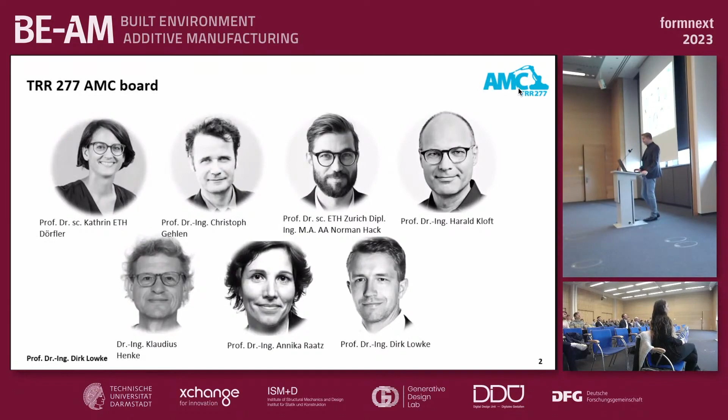When I was born, somewhere in the middle of the 1970s, there were about 4 billion people on this earth. Some months ago, you heard it from the news, we exceeded 8 billion people. So there's a steep increase in population in the world.

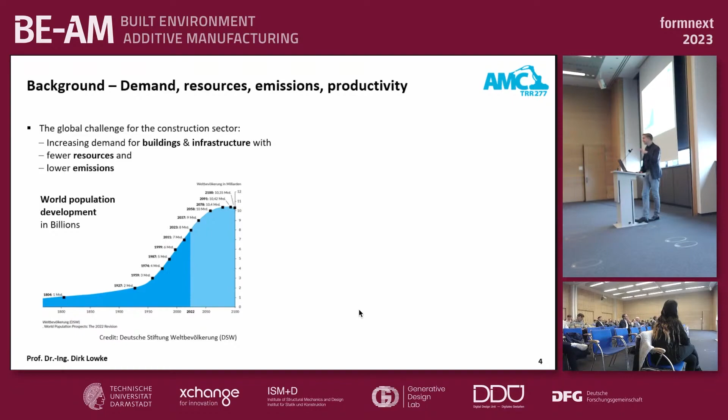However, construction is not prepared for this challenge. As you can see here, since the 1970s of the last century, the productivity is almost constant. We have not developed in construction, we have the same productivity as in the 1970s.

And on the other hand, with this technological stillstand in development, we are less attractive for young people. It's the second problem we have. Young people are not anymore keen to become a civil engineer, for instance.

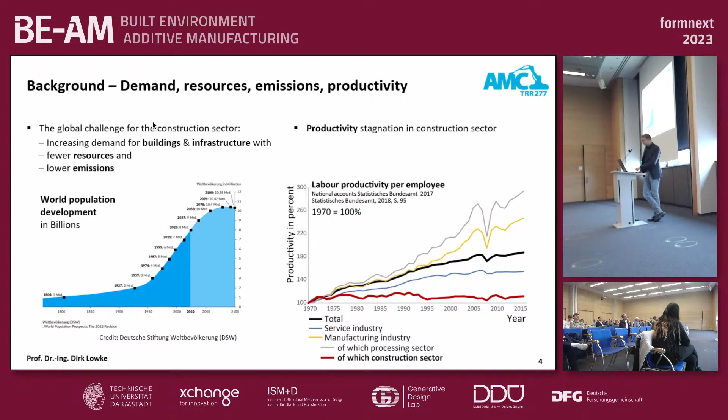If we have a look at other industries, we see there is huge progress in automation, but in construction, we still have this huge amount of labor activities on the building site. And digitalization has not arrived at the construction process too far.

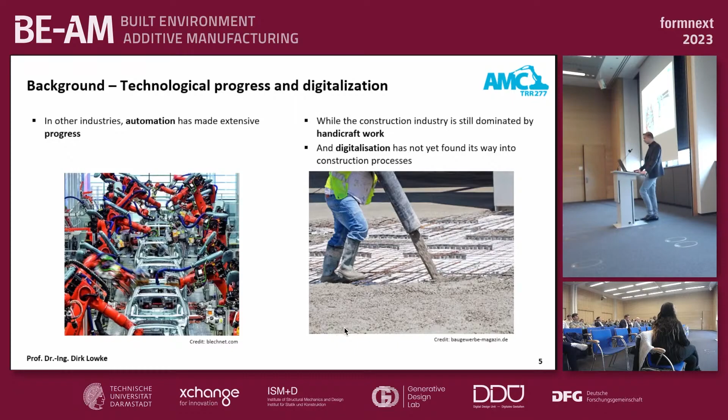Also, there was some progress in the planning phase. I think a lot of architects are here, but as you come to the building site, there's a break in the digital chain, and the real construction process is not digital.

If you look on the right side, you see typical construction elements made of concrete, and these are often characterized by mass-intensive and resource-consuming geometries, and this means we have high CO2 emissions here.

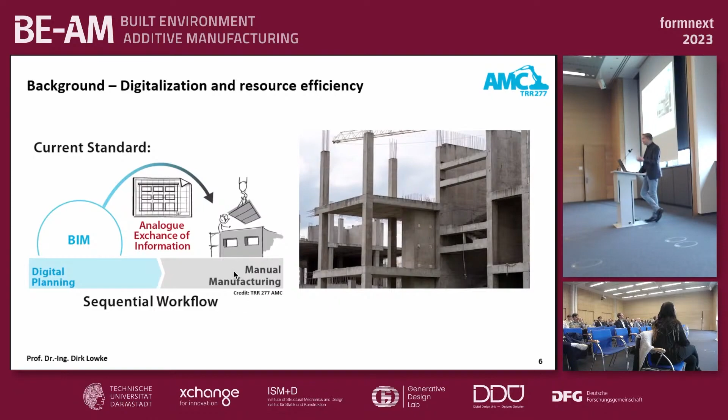So the good news is, with additive manufacturing, a promising construction technology is emerging right at the right time. We believe that the technology of additive manufacturing can help solve a lot of the problems I mentioned before. With additive manufacturing, for instance, you can significantly increase the automation in the construction industry. With additive manufacturing, you have no need for special tools if you want to produce different shapes or different forms.

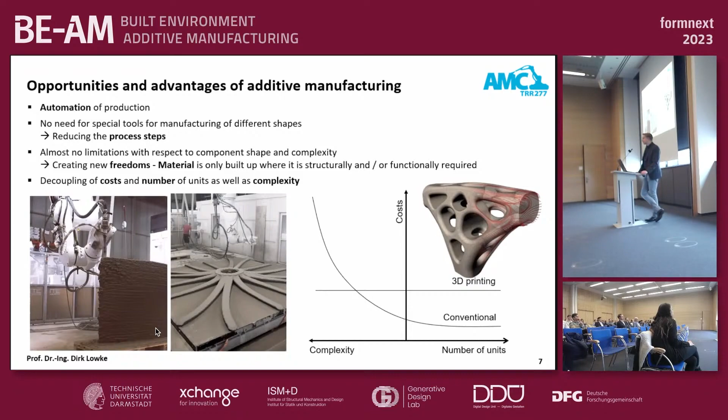So we can produce shape and form optimized concrete elements, which results in reduction of resources we need for these elements. And there's research showing that the reduction of masses in concrete construction, for instance, could be up to 50%.

Well, and this is precisely where the Collaborative Research Center, TRR 277, steps in. The TRR 277 is research on additive manufacturing in construction, and we have been investigating additive manufacturing technology since 2020, so we are now in our 4th year. The mission statement of the first funding period of this research program was the challenge of large scale.

Because what distinguishes additive manufacturing in construction from other additive manufacturing technologies in other industries is exactly the large scale. There are a lot of challenges which result from the large scale, and that's why we need special solutions for additive manufacturing in construction.

Let me shortly introduce the TRR a bit more in detail. The research is structured in 3 focus areas. You see here in the middle, focus area A is materials and processes. Then we have focus area B, computational modeling and process control, and focus area C.

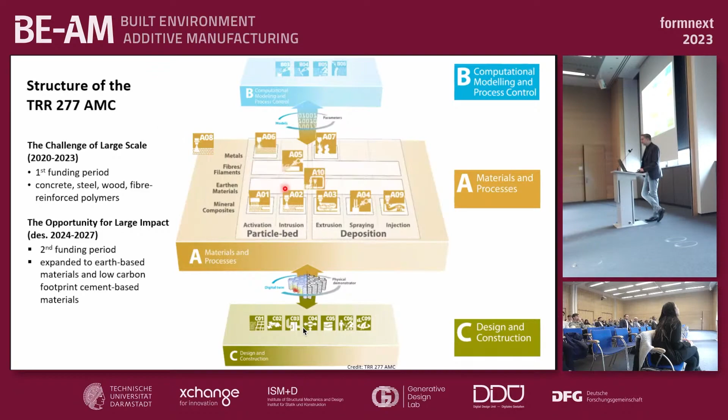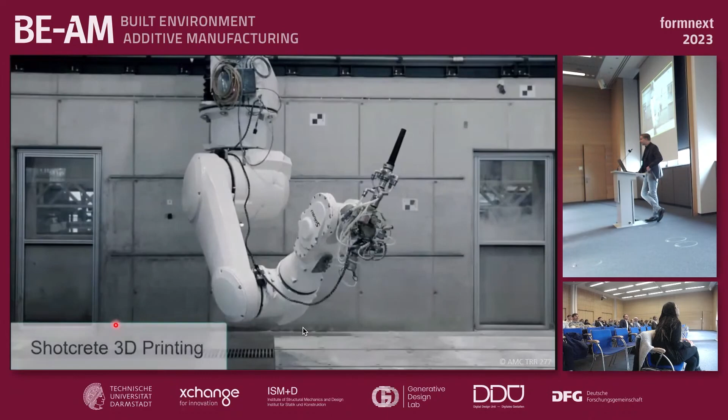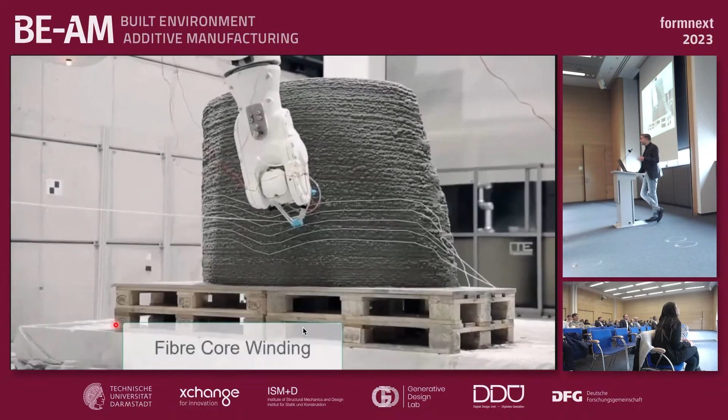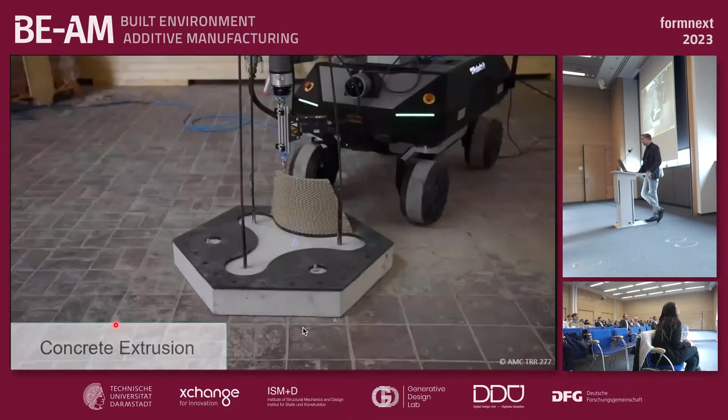Let me show you some insights of our research. Here you can see some of the processes and process-material combinations we work on. This is the concrete printing process, Shotcrete 3D printing, and here you can see we think about how to integrate reinforcement into these processes. Then we have concrete extrusion and clay extrusion processes. Mobile robotics is a big topic in our research.

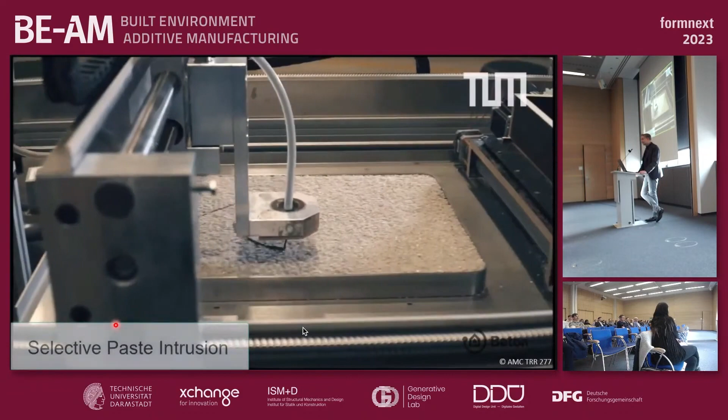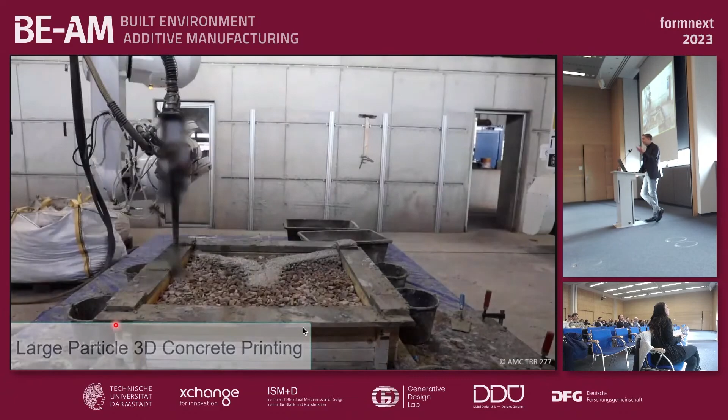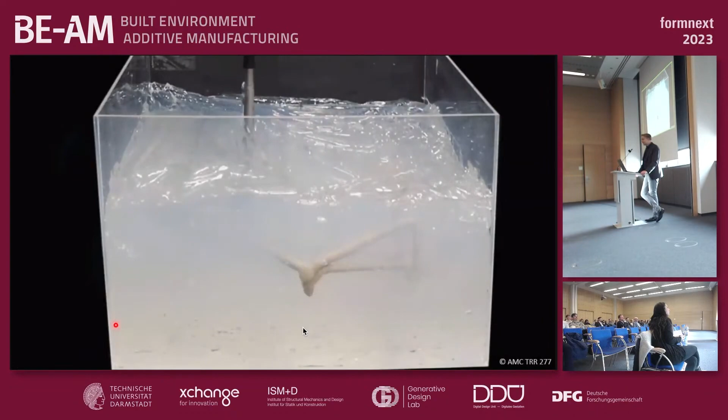Here you see particle bed technology, another interesting technology to produce really high resolution objects and objects with a high freedom of form. Another project is this Selective Paste Intrusion, and we go even higher in scale and investigate large particle printing. Then we're dealing with new technologies like injection 3D printing. We will see more of this here at the conference.

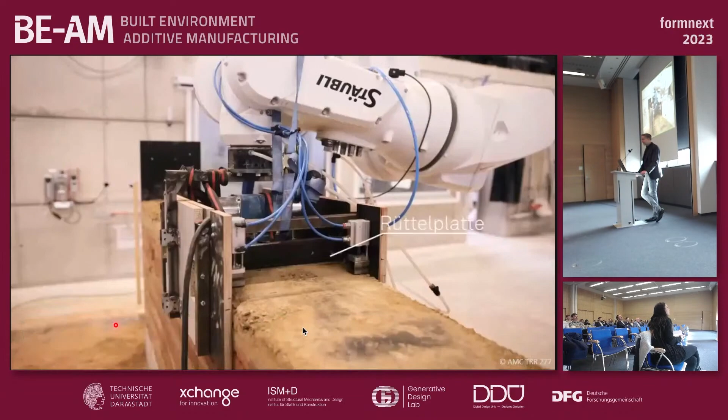And of course, earthen 3D printing, another important topic. Here you see an automated ramming process. Wood printing: here we developed a structured timber process by individual layer fabrication.

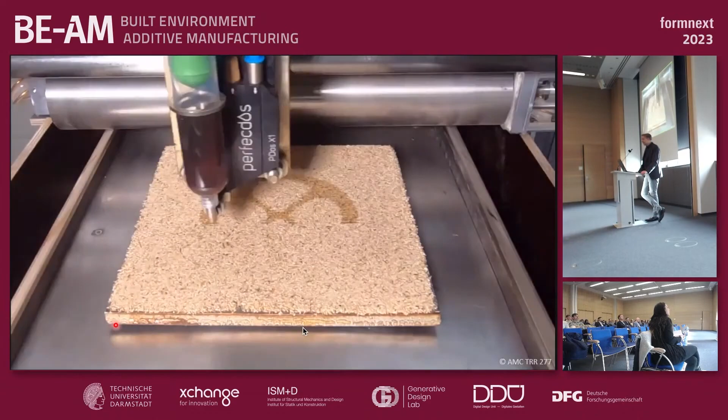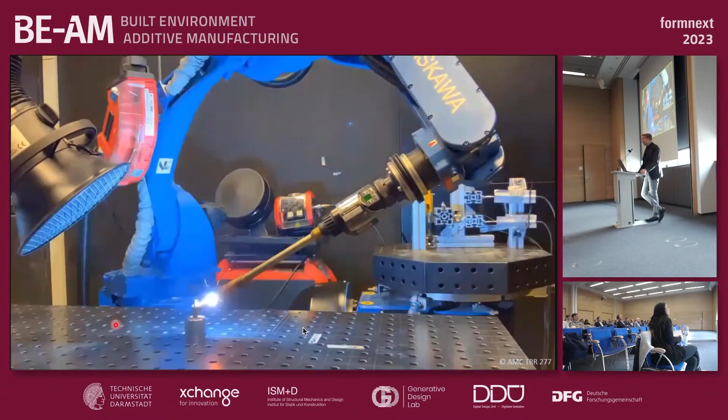And of course steel, as the second most used material in construction. Here we are looking both at the deposition techniques - you can see a wire and arc additive manufacturing technology - and at the powder bed techniques. As an example, here you see a part from laser powder bed fusion.

So that was a short first impression of our research. I don't want to go into detail here, but in total you have 10 projects in focus area A, covering these process-material combinations. So shortly, we have A1 and A2, which focus on particle bed techniques with concrete.

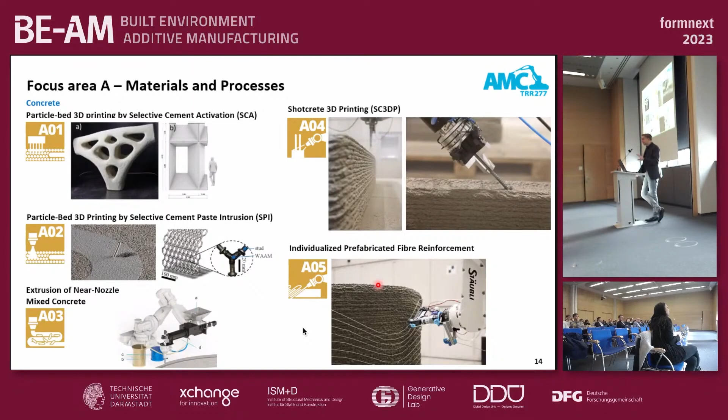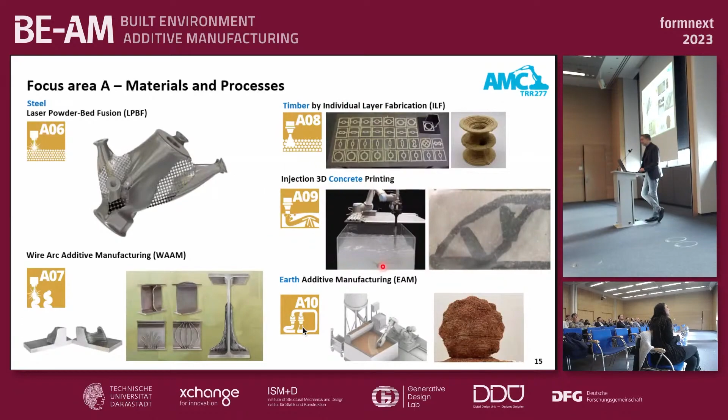We have A3, which investigates a near-nozzle mixing extrusion process. Then we have this Shotcrete process we saw already in the video, where we have a big focus on reinforcement integration. Then we have a separate project focusing specifically on how we could integrate reinforcement with fiber winding processes. Then, as I mentioned, steel in A6 and A7 - steel additive manufacturing - timber in A8, and then we have this new technology, injection 3D concrete printing, and earth additive manufacturing.

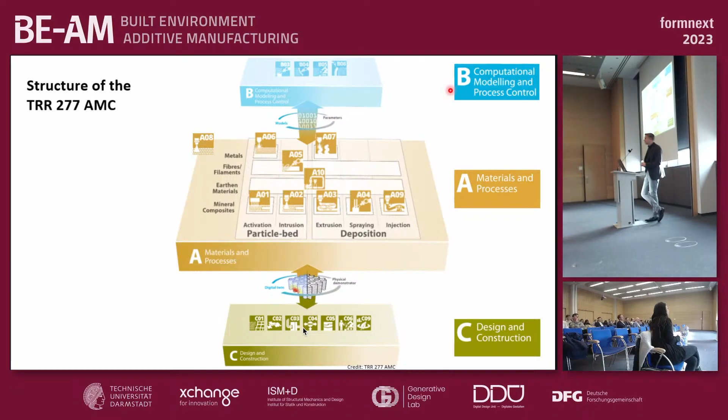Well, you see there's a lot of material-project combinations. Then we have this research in focus area B and C, and the big challenge in such a research center is how to combine all these projects and how to bring the researchers to collaborate interdisciplinarily. Here we developed an idea that we put a demonstrator in the center of our research, and all projects of the TRR can contribute to this demonstrator.

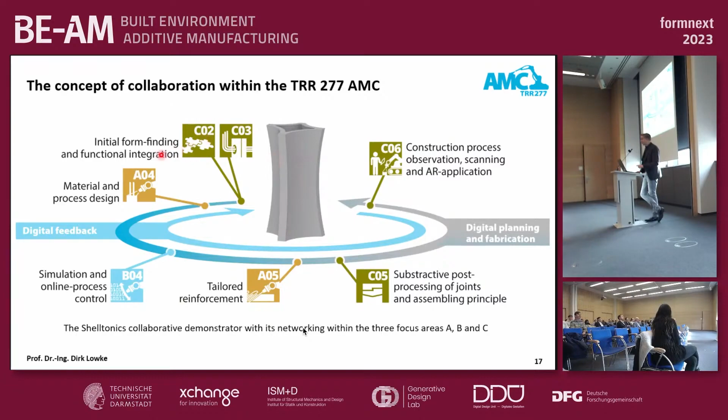As I told you, these demonstrators are large scale, so we are aiming to produce real building elements in one-to-one scale, and all the projects of the TRR have to bring their expertise into these large-scale demonstrators. Now I will show you three examples of these demonstrators. In total, we have nine large-scale demonstrators. If you're interested, I invite you to have a look on our homepage, where you can find all nine demonstrators, but today I did a selection of three.

Let me start with our particle bed technology. You see it here in A01. This is the Selective Cement Activation technology developed in the TRR, where you bring a binder and aggregate into the particle bed - it's the dry particle packing - and then you activate by applying water on distinct areas to harden the material.

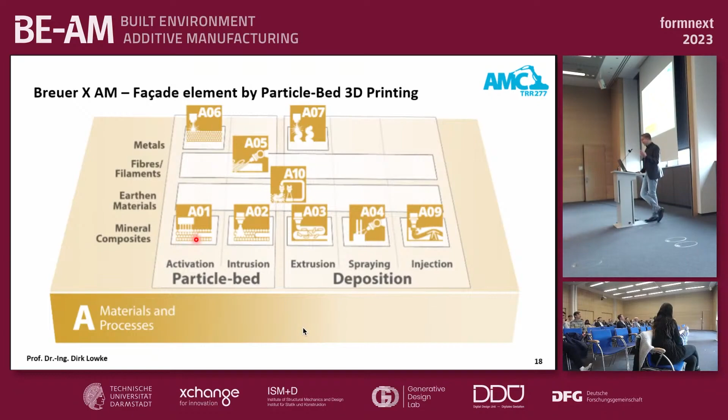And this technology is usually characterized by really small building chambers, so it's not even close to construction scale. What we did is increase this to large scale, and fortunately we have two industrial partners who built a large-scale printer, and another partner who used this printer to build, together with us, this real scale element. As an example, there was a design from the architectural department - we used this facade element, which you can see here.

It's inspired by the architect Marcel Breuer, and you will see it later. It's a round-shaped building, and one of the functions of the element is to have natural shading depending on the location in the building. So each facade element has a different geometry, and that's perfect for additive manufacturing, because you can be really optimized in relation to the position of the facade element.

Then we have further functions here. You see a microstructure on the surface, which is a kind of micro shading that helps reduce the temperature on the building element. Then we have parts in the middle of the element for thermal insulation, and at the back of the element we have the structural part of this facade element.

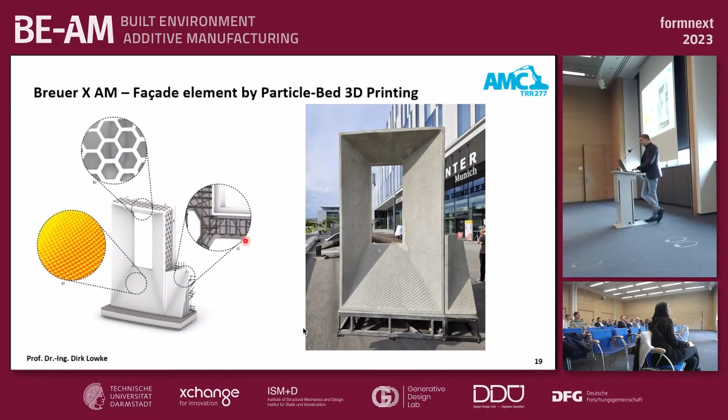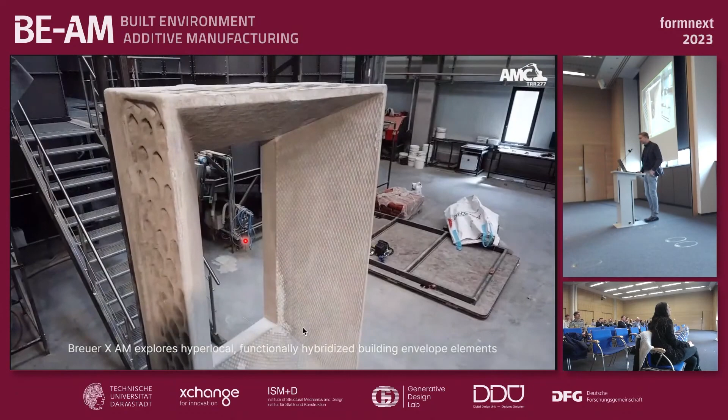Let me show you these videos so you get some impressions of the production process. This is the final element after production. It's about 2.80 meters, I think, or even higher.

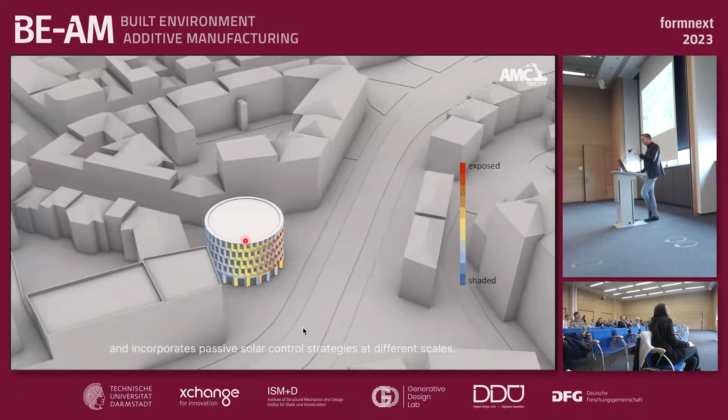Here you see the design of the building. These are the facade elements, and we picked one of them to produce with selective cement activation technology.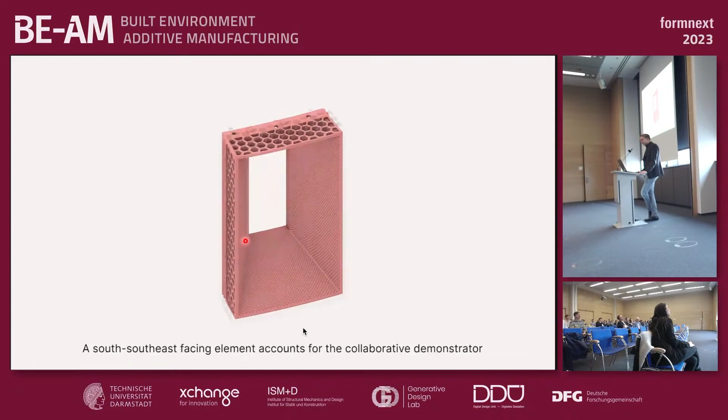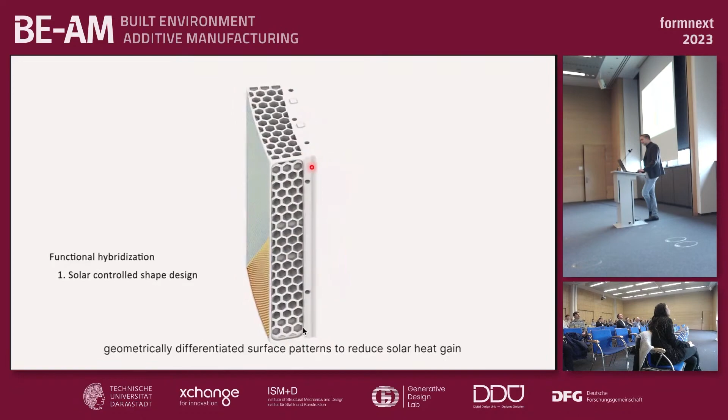Here you can see the different functional areas: this structure, then the thermal area in the middle, and the structural function at the back of the element.

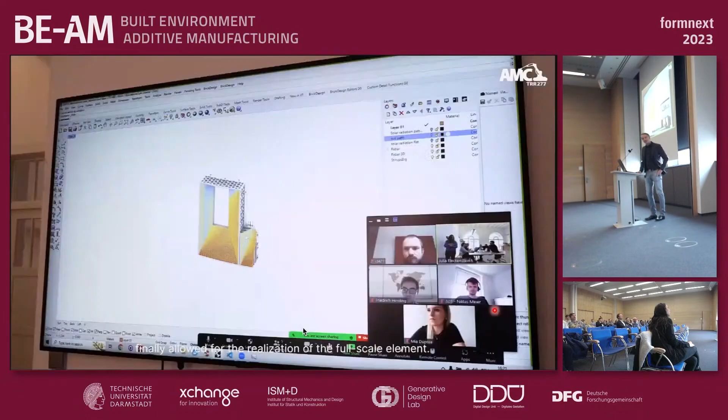Of course, we did some research on the material. I will not go into detail on that. It's more about the production of the big element here.

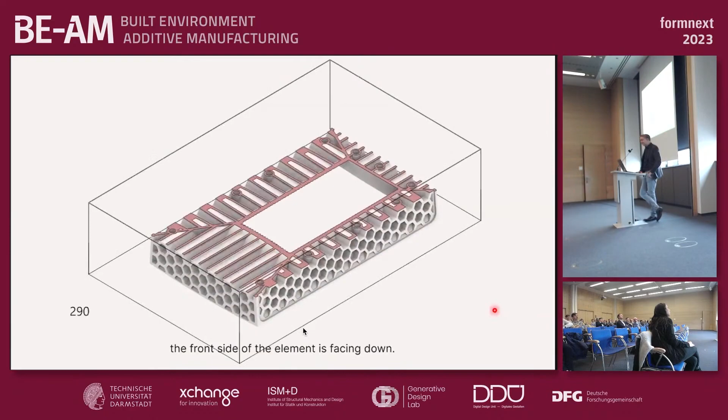Here you see the 3D model, which then went into a large-scale particle bed printer. It's 4 meters by 2 meters by 1 meter, so it's really able to produce this element in one part.

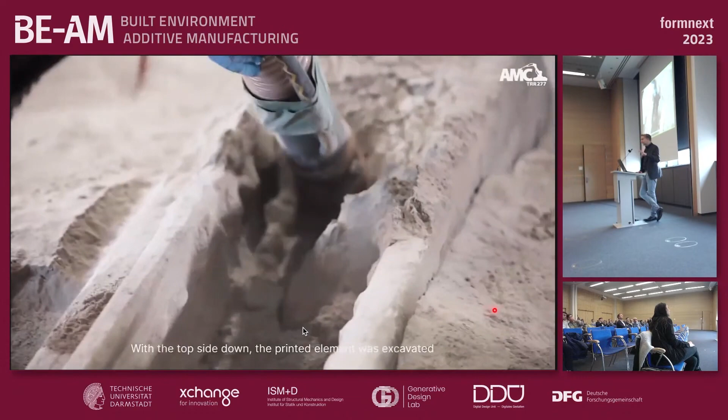To increase the structural or load-bearing capacity, we combined this printing process with mixed concrete. So we used part of the element as formwork to integrate the reinforcement in this case, and to increase the structural load-bearing behavior.

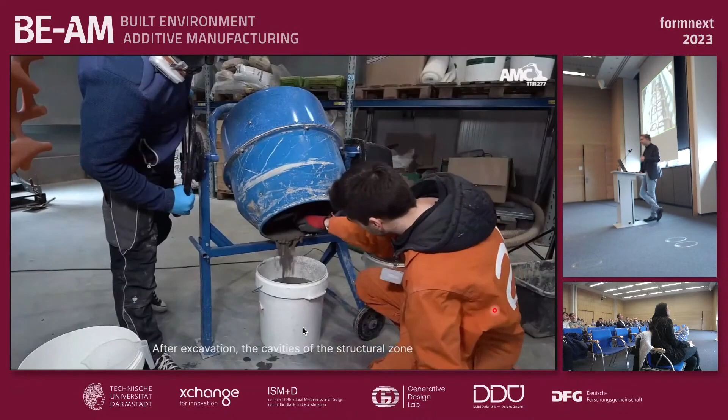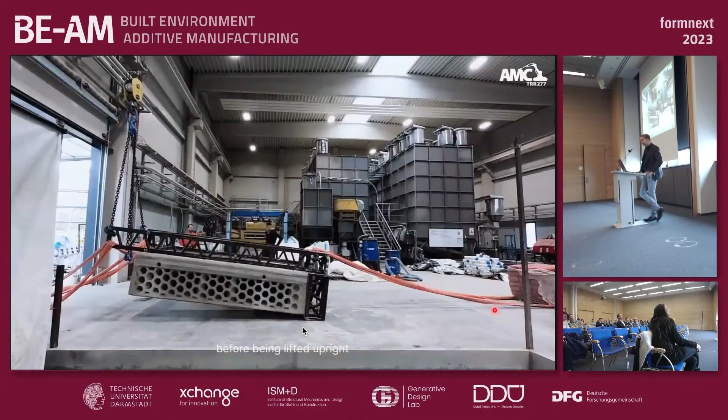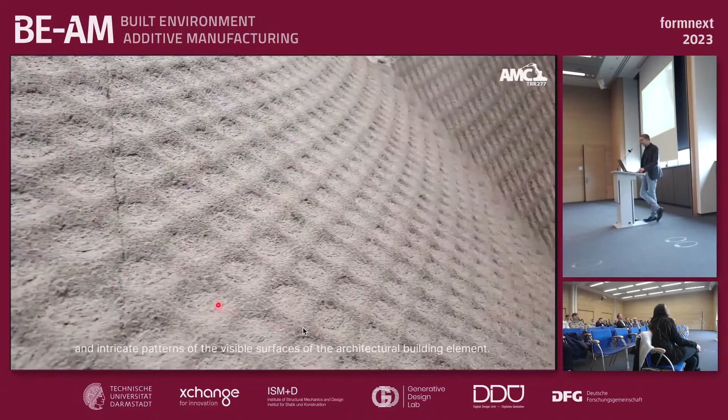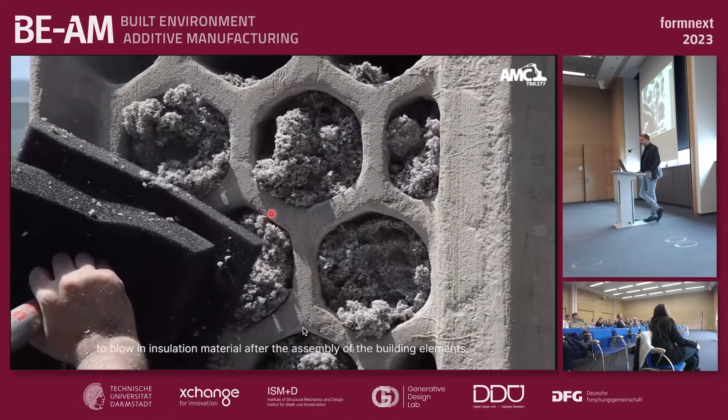So this is the part in the back, or the inner part of the element. The great advantage of these particle bed technologies is that you can really achieve high resolution surfaces, and you are really free in printing forms like hollow structures. Then we filled this structure with insulation material, and this is the final element.

The second example is still in this lower area. It's printing with concrete, and we showed what we can do with the Shotcrete 3D printing process here in A04.

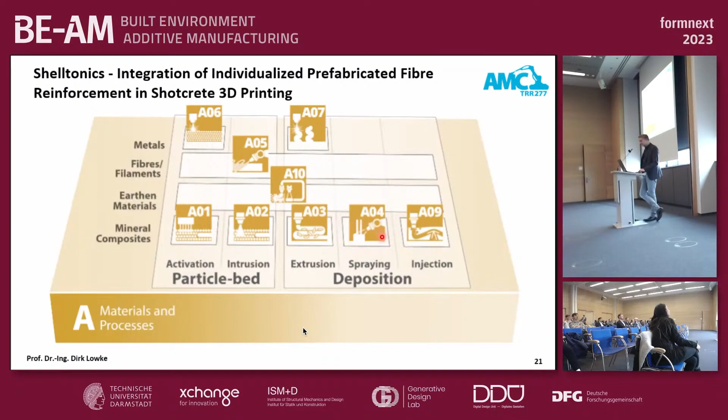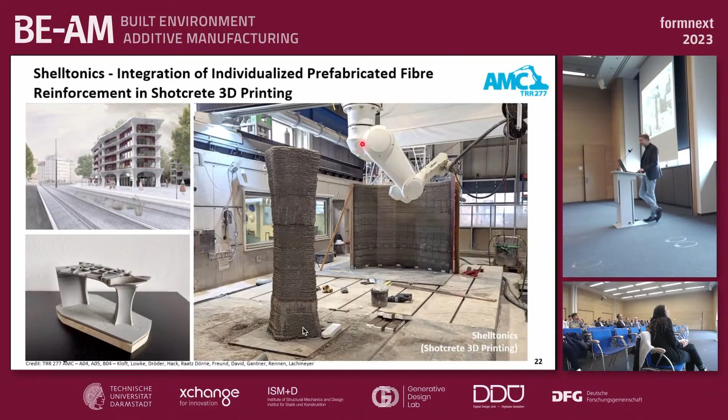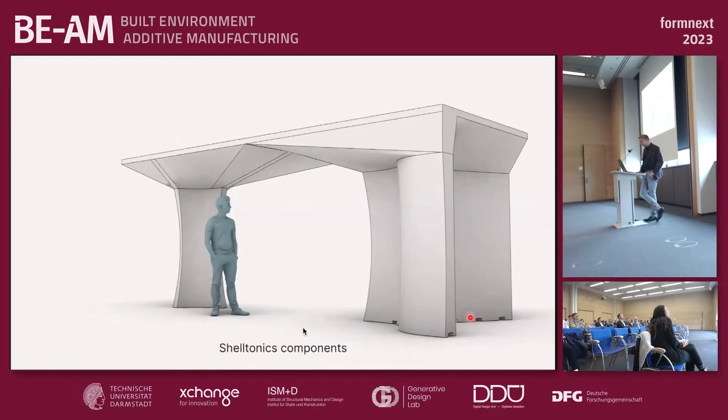On the right side, you see the process. It was printed in the digital building fabrication laboratory, again at 1-to-1 scale. You can have a look into the process with a video. This demonstrator is called Shelltonics.

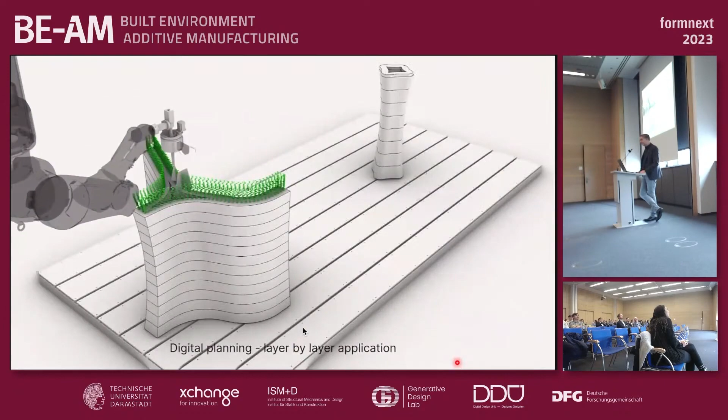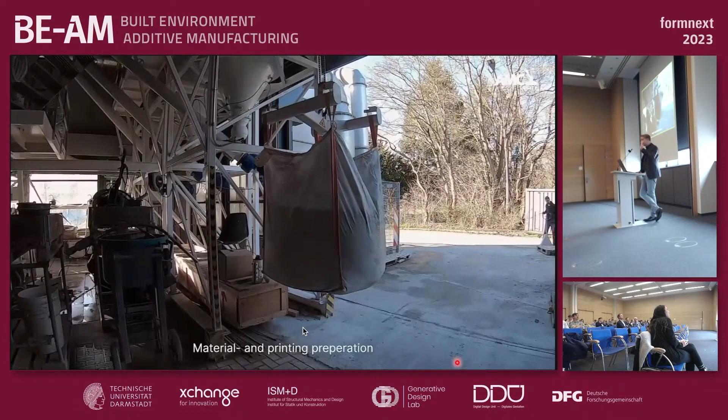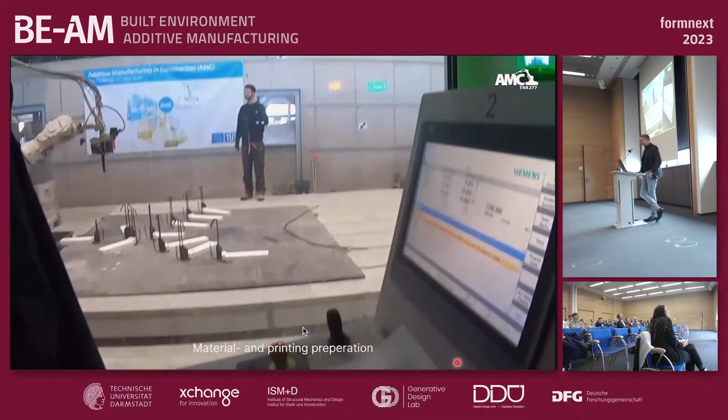Of course, we printed with integrated reinforcement here, because if we're talking about concrete 3D printing, we always have to think about how to integrate the reinforcement. We added a second, vertical layer to smoothen the surfaces. As in conventional technology, it starts with producing the concrete, and then the 3D printing process starts.

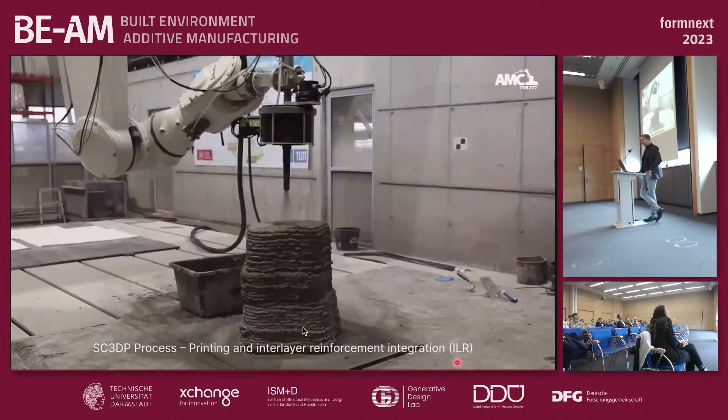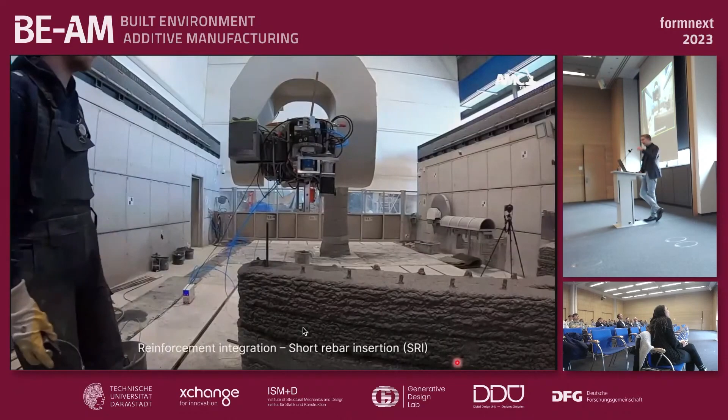The column and the wall element were produced at the same time. Here you can see how we integrated the horizontal reinforcement. It was done by hand here, but you can also imagine having it done with a pick-and-place process by the robot. The vertical integration was done fully automated with this short rebar insertion technique.

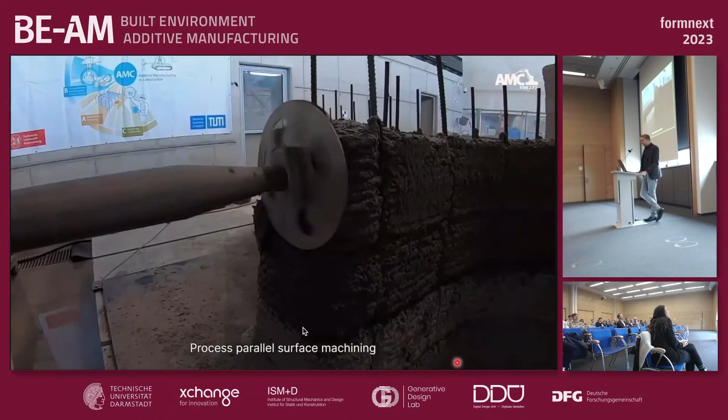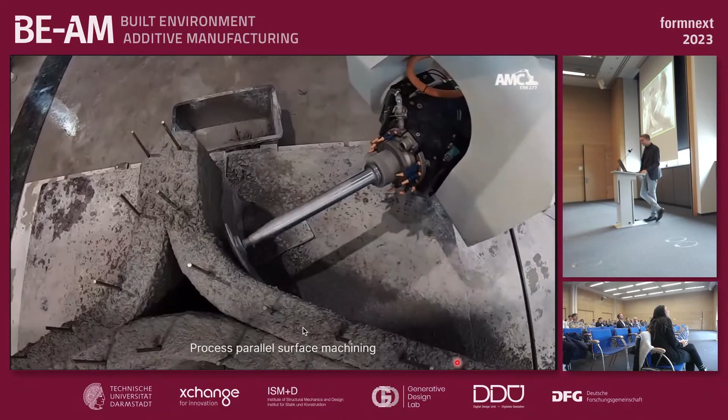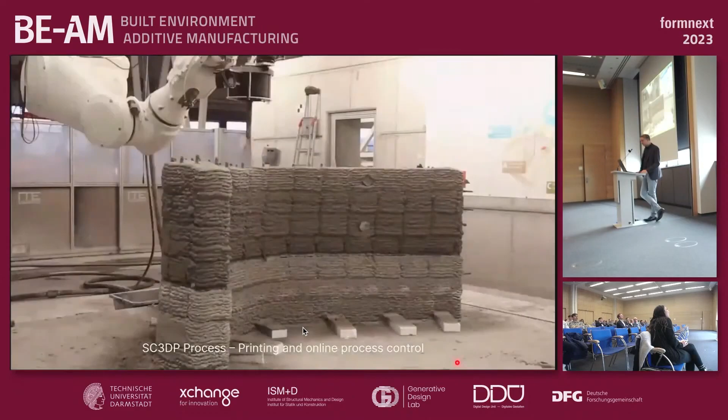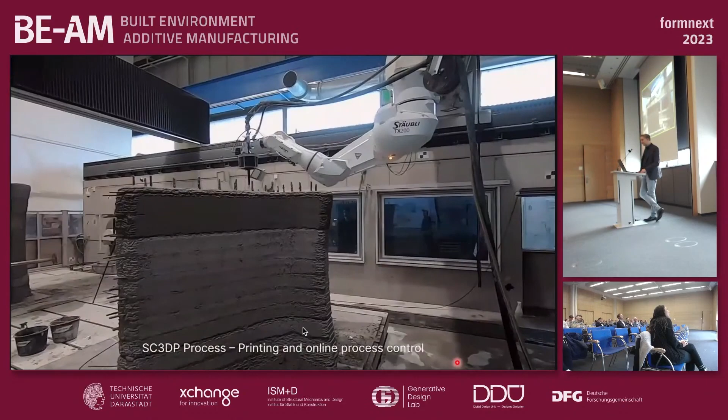Here you have some impressions of the surface smoothing process. At the end, the second layer, or cover layer, is applied on the surfaces, and you can create a quite nice concrete surface.

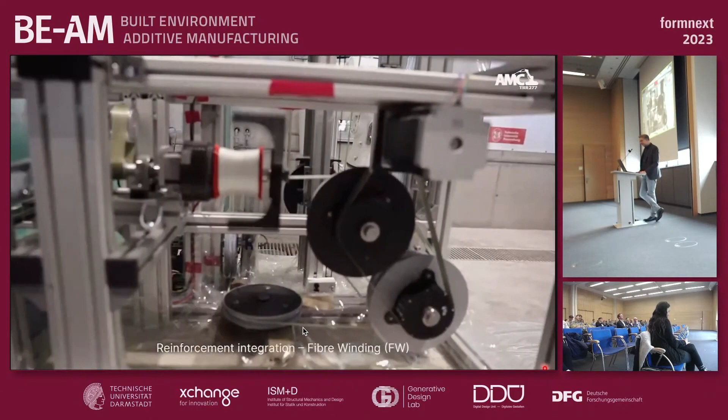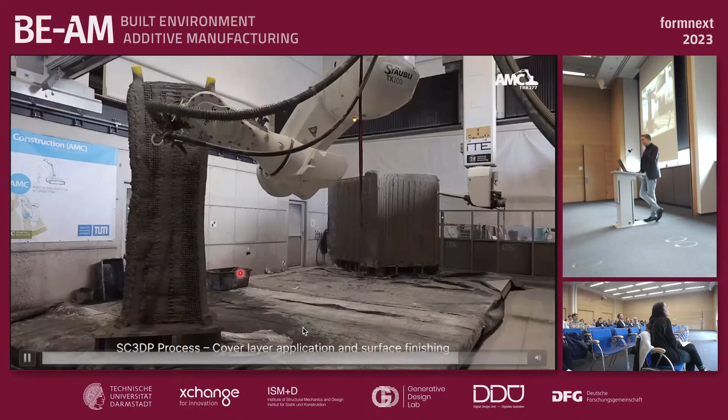The second reinforcement process we used here was this fiber winding process. You can see it here: fiber wound around the column and then covered with the cover layer to get the bond between the reinforcement and the concrete element.

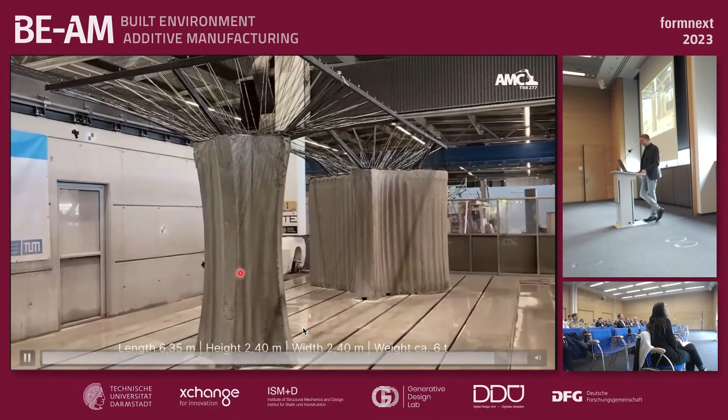And this is the final product. We ran out of time, so the ceiling was not ready at the time. We had to show this demonstrator as is, but we will produce it in the next funding phase.

The last process I will show you is quite interesting. By the way, this project A01, the Breuer facade element, will be presented later today, and also the project I'm showing now, the injection 3D printing process, will have a specific presentation here at this symposium later. The injection 3D concrete printing process is a quite novel process.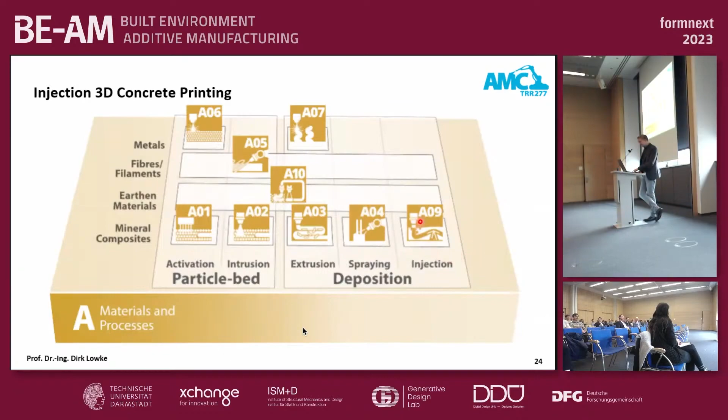It's a process we developed at TU Braunschweig. The idea is that we inject material into a carrier fluid, and this carrier fluid holds the injected material in position, so it's not sinking down or floating up, but hovering exactly where we printed it. The big advantage is that you can get rid of the layered structure of 3D printed elements, because you can print freely into space wherever you want. So if we're honest, the other techniques are more 2.5D printing, while here we have real 3D printing because we're going into space.

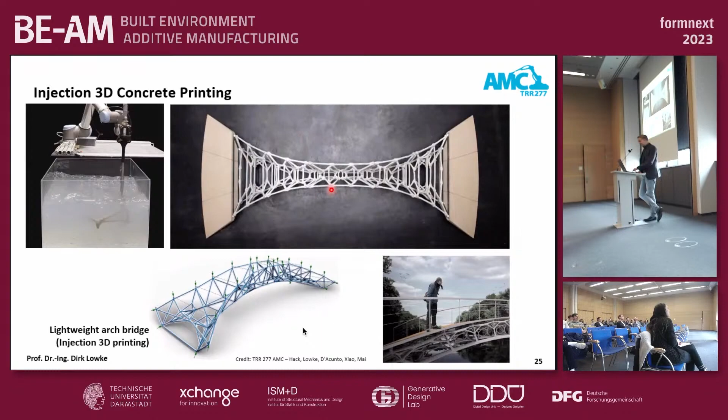What you can produce with this technique are really filigree elements, as you can see in this bridge example. And again, we will have some questions here in the video.

So this is the design. The basement was produced by particle bed printing, and the bridge structure in the middle by injection concrete printing. Here you can see the path planning of the bridge elements. These bridge elements were segmented and produced in smaller parts.

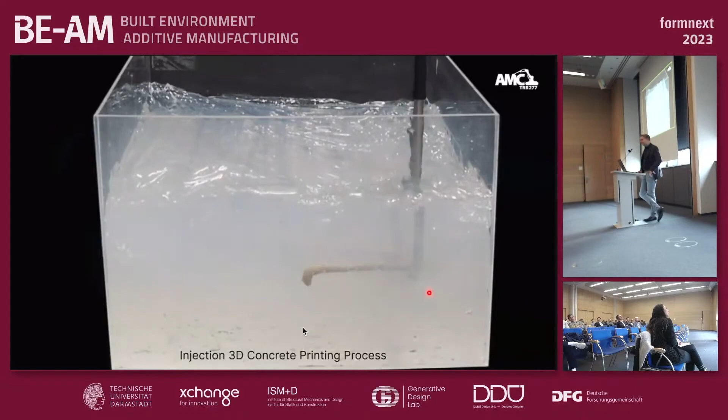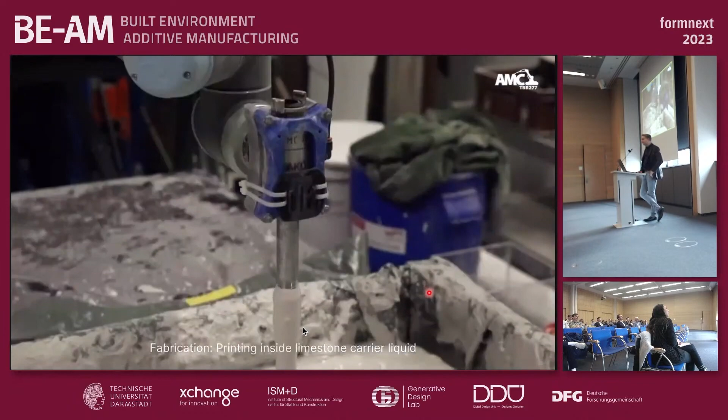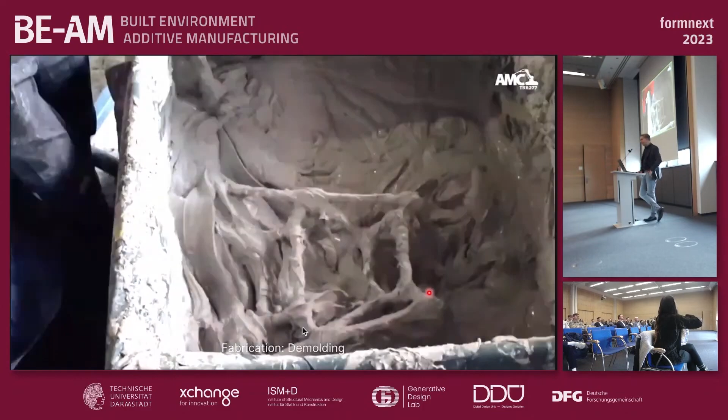Here you can see the printing process in a gel, and the concrete. But of course the gel is too expensive, so we developed a suspension made of limestone to print into, which has the same rheological properties as the gel. We print the bridge structure into this muddy container. At the end you have to remove the limestone suspension. It's not reacting in any way, so you can use it again for the next production process. It's only stone powder and water.

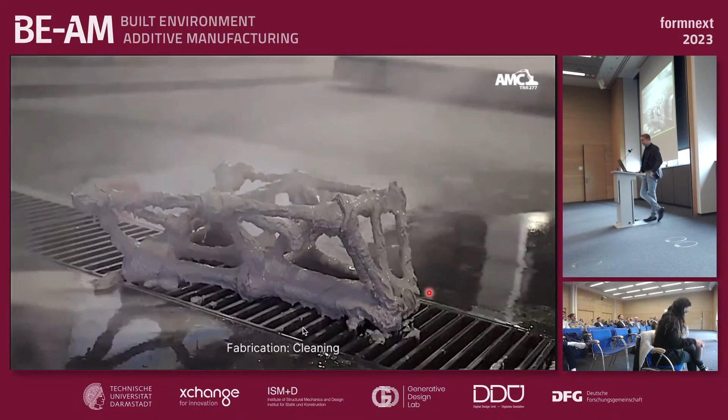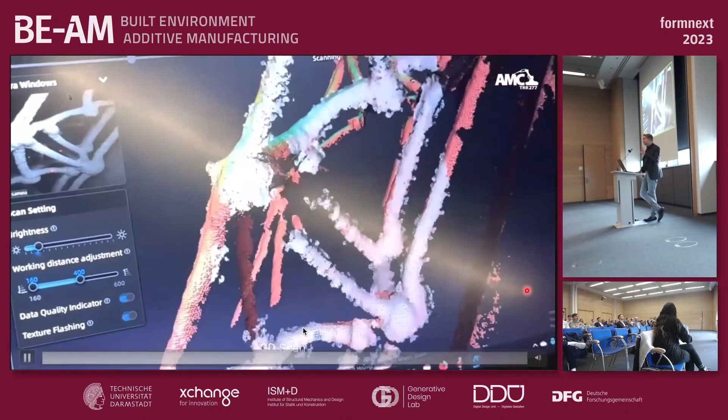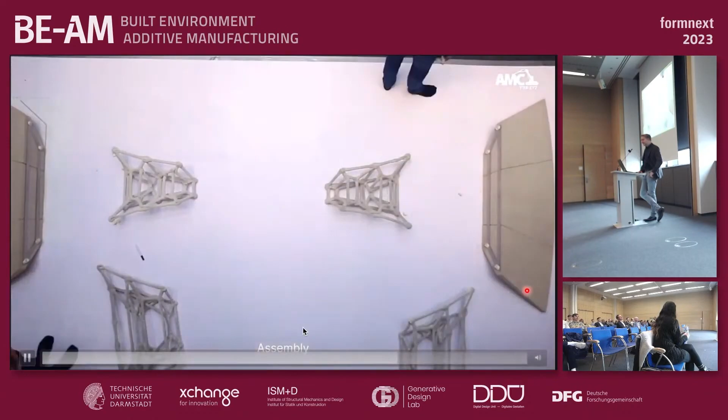Then you have to clean the object. Then we 3D scanned the bridge elements to 3D print connection elements between the segmented bridge elements. Then we assembled the bridge in a collaborative effort, needing a lot of researchers from the TRR to bring it into form. And this is the final product.

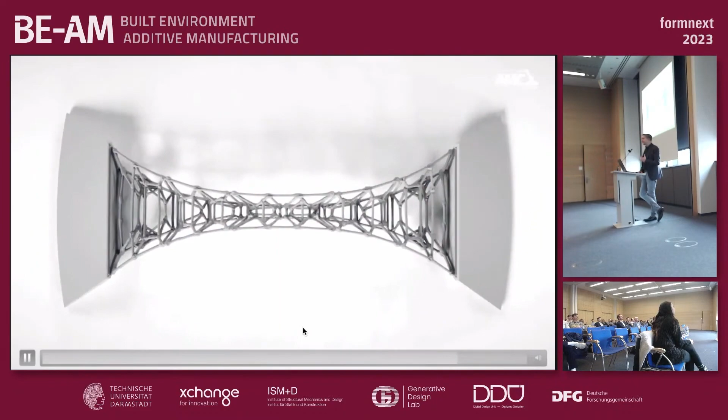Okay, these were three impressions from our research. If you have further questions, please ask me now or in the coffee break.